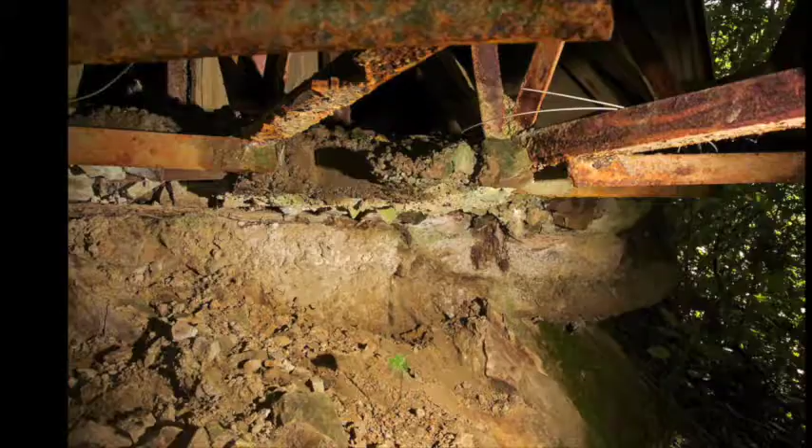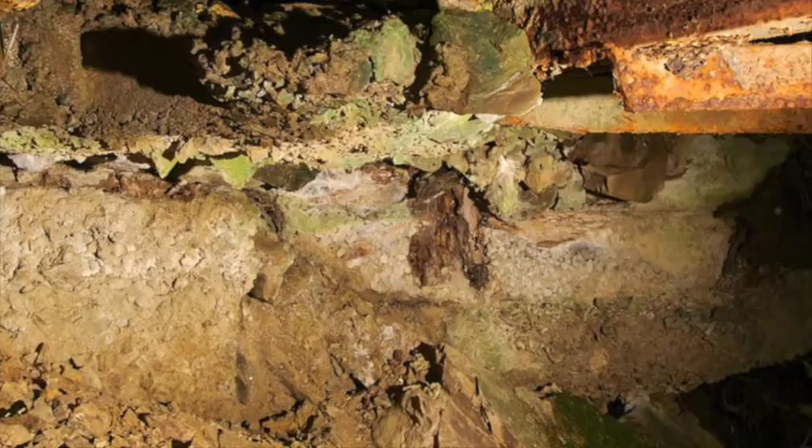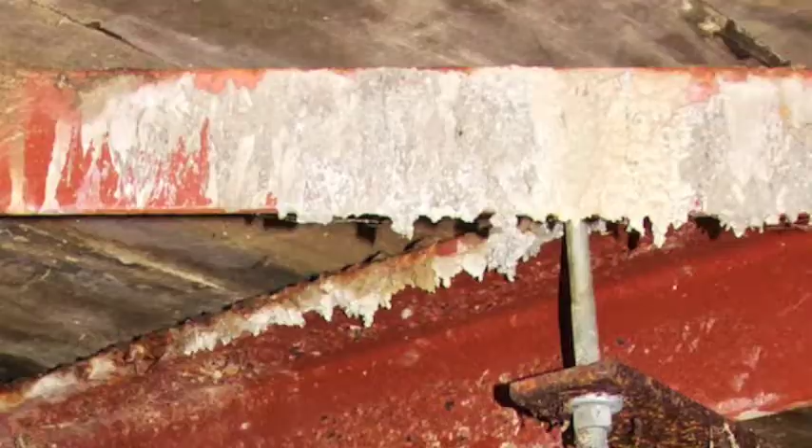An integral part of the foundations and the abutments of the bridge is the concrete used to essentially hold it all in place. We're at the abutment end here, and the concrete, this bridge was never ever set on this abutment. Somebody's propped it up on a timber block to get it into its position, and then they have just put some corrugated iron up against the end of it and dumped concrete down over it. And there's concrete all over the metalwork. It's just an absolute mess.

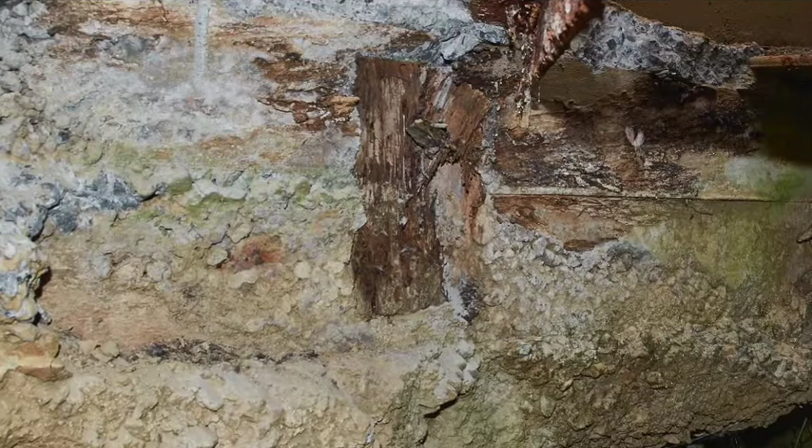So, for example, over here, this is a bit that's intrigued me. There seems to be a beam of wood or something there. That is wood. What they've done is when they've dragged these across here or whatever, they've propped them up and got them to the height they want so they're in alignment with each other, and blocked them up with a block of wood, and then they've just dumped concrete over the top of them. Now, I'm not an engineer by any means, but it strikes me that perhaps you wouldn't want to put wood inside concrete.

No, I mean, the correct way to do this job would be to bore down and put your foundation piles in first. Once you've concreted those up, you may actually box the whole abutment in one thing and put your cages in, tie them into your cage at the top of the abutment work and pour the whole thing at once. Otherwise, you'd pour the piles and then you'd box around those, put all your abutment steel in, position your anchors, box and pour that off, and then you'd crane your bridge in.

Having put the bridge in, you'd normally finish one abutment first, completely head wall and everything, crane the structure in, and then you can put an expansion joint into the back end and pour the last head wall after. Now, correct me if I'm wrong, but judging by the way the steel from the bridge is coming out of the concrete, it's almost as if they placed the bridge down and then almost buried the end in concrete, for want of a better word.

It's very clear that what they've done is placed the bridge to where they want it, blocked it up to suit, and then they've just mixed up concrete and thrown it over the top. And the concrete that they've used, it almost looks like there's several different types, is that right? There are multiple different batches of concrete in this foundation. And is that a standard practice? Absolutely not. I doubt whether some of that would come to 10 MPa, which is what we call site concrete for filling in holes. It is certainly not structural concrete.

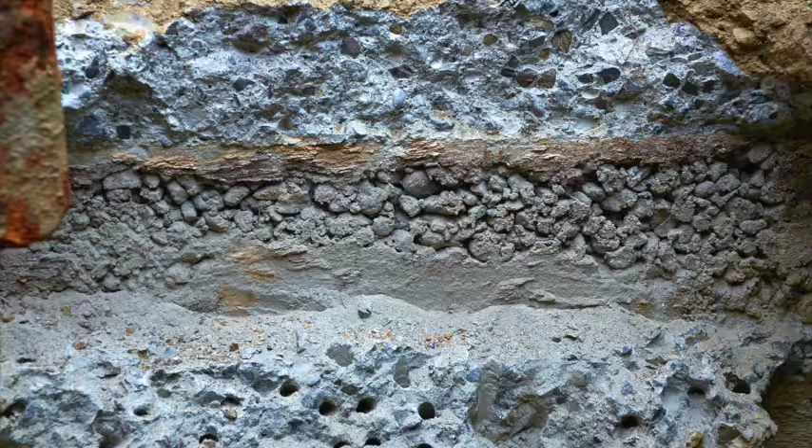So going back to my original question for the steelwork, has at any point in this bridge's life the abutment at the southern end or the abutment at the other end been fit for purpose? No, never. Have they ever been safe? No, they've never been safe. There's been no geotechnical investigation done. Had it been done, they would never have allowed that type of construction. So we're not talking about something that was originally safe and has deteriorated over time. These were never safe. Never, ever safe. So looking at the concrete, and I'm not a bridge builder, is there anything good about it? No.

Now would be a good time to speak with our engineer, John, to try and understand what is going on. Okay, looking at the abutments of the bridge, one thing I noticed when I photographed this bridge is that there are definitely several different types of concrete in the abutment. Is that normal? Well, no. I think on that bridge it's an L-shaped abutment. Yes, it is. You would normally then expect two concrete pours. One would be for the slabs that the bridge sits on, and the other for the wing wall, which goes vertically, keeps the soil back and supports the road as you drive onto the bridge.

Given the size of it, one would expect each abutment to be in two pours, and you would probably pour both of the flat sections at the same time on opposite sides, and then the two walls. But with proper formwork and compaction, one would normally expect it to look fairly monolithic.

So as a layman, I wouldn't be able to go there and then say, oh, there are 3 different types of concrete. No, you shouldn't. And if it's properly compacted and so on, it'll probably have a bit of a rough finish being the sort of structure it is, but it should look fairly monolithic. So you wouldn't expect to see large, like 3/4-inch pebbles in there? Well, if you can see individual stones, it indicates that the concrete has not been properly compacted. Yeah, you can definitely see individual stones.

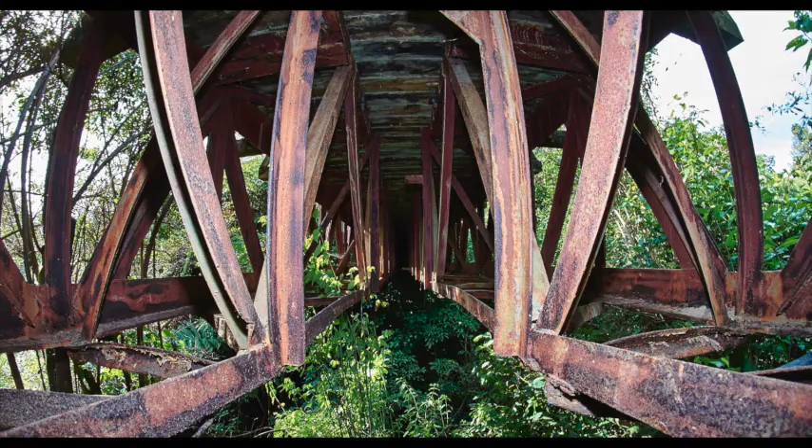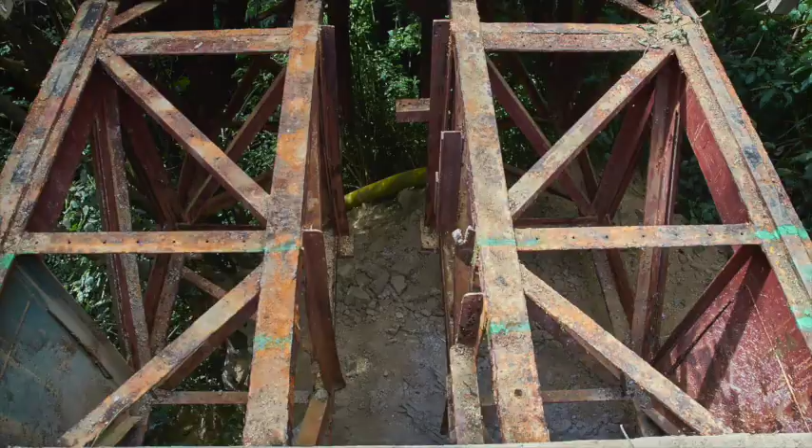The next part Stuart and I looked at was the steelwork which makes up the main trusses and structure of the bridge. I see a couple of latticework truss frames that were, in a previous life, some form of overhead gantry. That's a crane, or what is that? That's a mobile structure used for lifting articles in a yard or a building. So it's like a big gantry crane. Yep, that's exactly what it was.

Yes, you heard correctly. The Bad Bridge is made up of 2 gantry crane trusses that originally resided in a concrete yard in Otaki. Now, you know why we had to use new steel for our good bridge in Part 1.

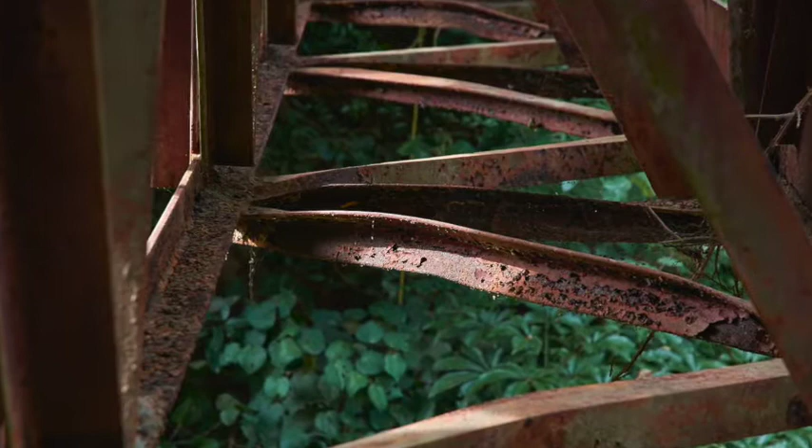The state of the members in it, being the bottom chords, the diagonal braces, the transoms, the bents, they have such severe corrosion on them to the point where, in some cases, they're not even there. They're completely rotted away. Okay, so now let's look at the members themselves. Now, this is a truss crane, so it's basically a box, and I'm looking at the beams underneath, and a lot of them are bent.

Now, if I'm correct, there are 2 ways that they could become bent. One would be through stress in the actual lifetime of the bridge, and the second way would be for them to have been damaged before the bridge was actually erected. So, from what you can see now, which of those 2 do you think it is? From the bends that we have in these members, it is clear to me that these bends have occurred dragging these trusses over the ground.

How you identify that is the south end that we're sitting at has significant damage to multiple members, all in the same direction. If you go to the north end, there's next to no damage there, because that's the end that was picked up and dragged. So essentially this end that we're sitting in was in contact with the ground for a greater period of time. Scuffing down the road.

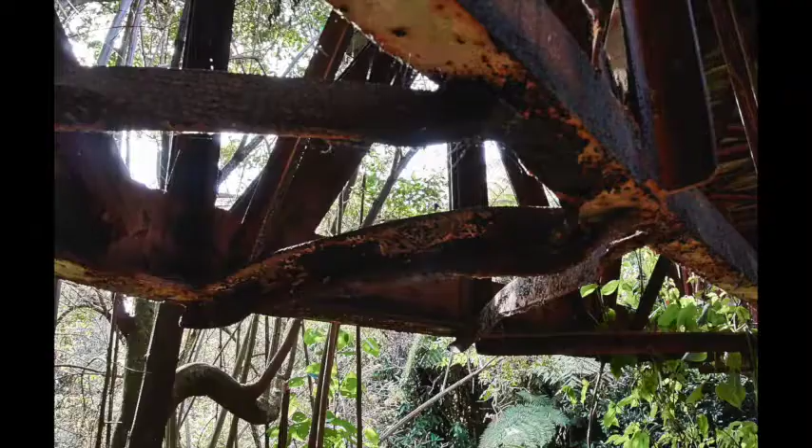And needless to say, one would have thought that Mr. Bolton, being the PS1 engineer for the bridge, and having seen the bridge in its installed position, would have at least noticed the damage and certainly should have ensured that the contractor repaired the damage. Sadly, none of these things happened, and what is more, the council inspector also didn't notice the damage.

John Scurry. Now, I'm assuming that as the PS1 engineer, and for that matter probably the council inspector, first of all, it would be reasonable to expect that you would pick up that kind of damage to a corrosion prevention coating. Would that be correct? Yes. If you are the design engineer, you should keep in mind essentially how something is going to be handled and built. One of the things that is... Just talking about buildings for a moment.

Yeah. One of the things that has annoyed me enormously in New Zealand is often the paint systems you specify on exposed steelwork, say some columns in a foyer or whatever, they can be extremely expensive three-coat systems, and yet that steel will be painted with this pristine finish, and it will be thrown on the back of a truck and other bits of steel thrown on top of it, and lifted with chains and the paint system damaged.

And I insist on, I put in my specifications, if a proper paint system like that is applied in the shop, I say that the paint must be allowed to harden. Yeah. You must lift it with soft straps. You must have timber dunnage and soft packing in between. So it sounds to me, as the PS1 engineer, you're actually responsible for, first of all, specifying the kind of corrosion protection coating that needs to be applied.

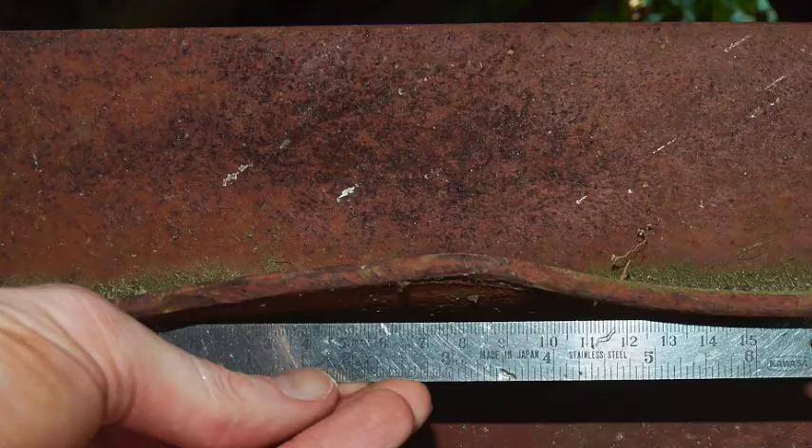Yes, and particularly if the member is in compression. If you've bashed a member so that it's got a big bow in it, then its strength in compression will be far less than if it didn't have that big bow in it. And if it's in tension and it's got a big bow in it, well, it would make it far more flexible.

Basically, they're supposed to be straight members, and the contractor is supposed to handle it in a way that it goes up and it's straight. So far, we have looked at the mechanical problems with the metalwork. Well, I'm afraid, as the old TV saying goes... but wait, there's more. What else is there about the steel?

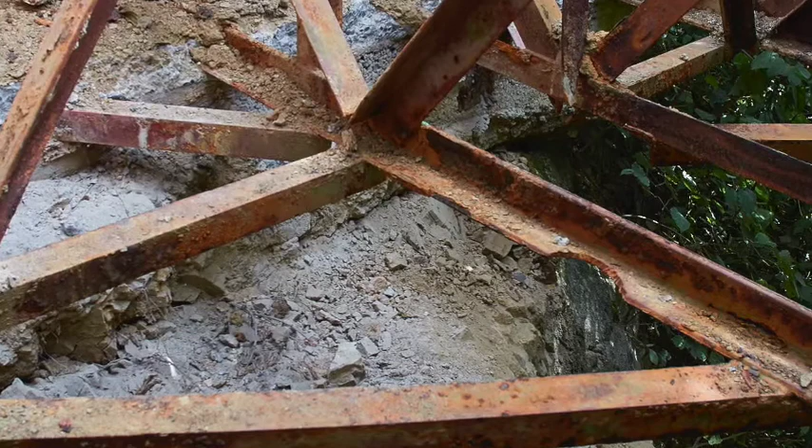So, for example, I'm looking down here and it's almost as if someone has actually bitten a chunk out of this. It's basically an L section, so it's like a corner, and it's as if someone has bitten a chunk out of it. Now, tell me about that, because when we were talking before, you were telling me that if there was a washer missing or a nut missing, the engineer had to do, or would be at the very least expected to do, a defect report. And we're looking at a beam that has a whole chunk missing.

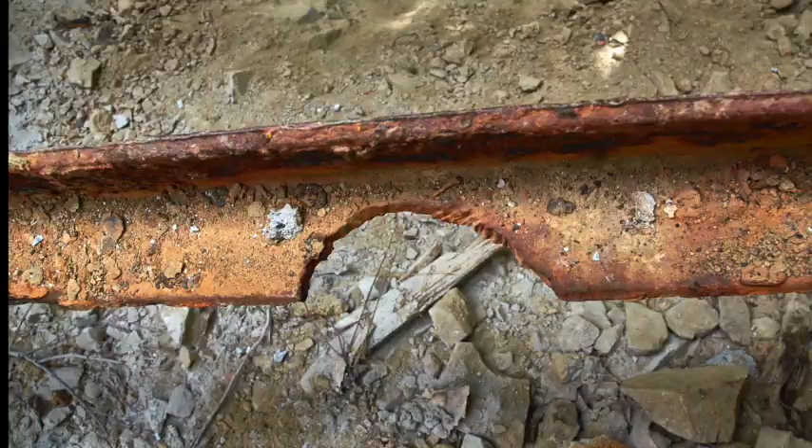Yes, and I think you'll find if you check Peter Bolton's original design, he makes mention of pieces that have had gas cut. That's had a piece gas cut out of it. Something was possibly welded to it in its former life as a gantry, and it was cut off, and they obviously weren't considering reusing it. Whoever bought these to use them as the bridge, the consultant has said these need to be rectified. They have to be cut out and repaired and then blasted and painted, and the work has clearly never ever been done.

So if you as a bridge builder, if somebody did that to you, or you found that in one of your bridges, presumably you would be beside yourself. Just this little chunk, never mind all of the bent beams, the rust, the fact that the things probably should have been condemned before it was even built. That is a bottom chord, and that is a tension member, and you've just removed 40% of it. So that's really bad. That's really bad.

So to put that in perspective, that's like having a person hang from a cord, and the person weighs 100 kilos and the cord can carry 100 kilos and there's a big chasm underneath them, and you just take 40 kilos of strength away from the cord and hope it will hold. That's correct. So looking at the condition of this metalwork as it is now in March of 2015, and assuming that no preventative rust treatment or no intermediate rust treatment has been done, is it possible that when the bridge was constructed there was no visible corrosion on it, no rust?

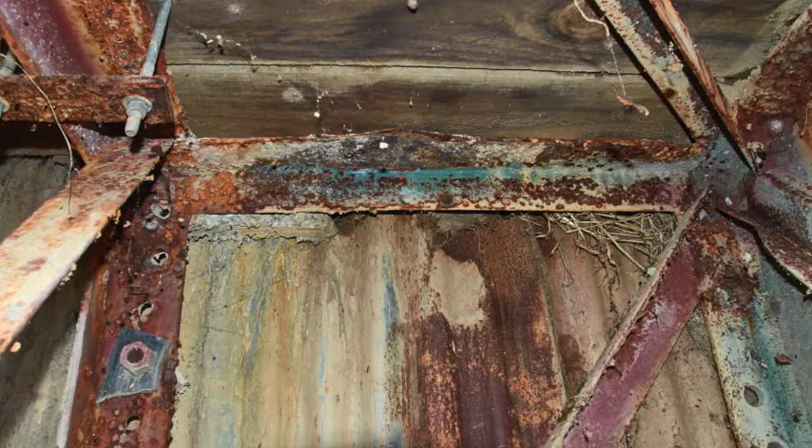Absolutely not. This corrosion's been here for 20 years or more. It is not possible to overstate the terrible condition that the steelwork of this bridge is in. And even as a layman, I have very little trouble believing that on the day the bridge was installed, there must have been some rust visible. But I am not a corrosion expert. Luckily for us, Mick Morris is, and he has seen the pictures of the bridge.

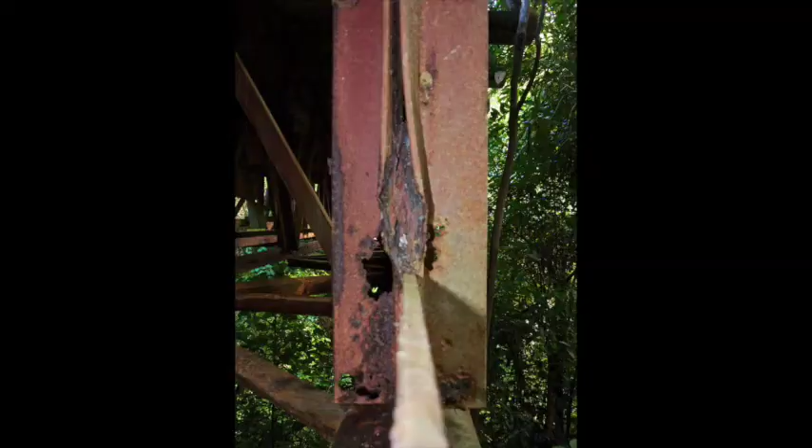This is an example of debris being stuck in a crevice, isn't it? Yeah, and then back-to-back members, angle iron. And take me through what's happened to that section, because it looks like someone put a little balloon in between the two members and just pumped it up and pushed them apart. Yeah, it's significant crevice corrosion. And unfortunately, that's a design flaw as much as anything. And does this go back to when I was asking you before, if I was designing a bridge in an area where I knew there was going to be debris, you probably wouldn't want to create crevices like this where stuff could accumulate? Exactly.

Looking at this picture, and again, this is DSC 1342, the damage where the steel is actually missing, from a coating standpoint, let alone from a plain looking at steel standpoint, would there have been any signs of damage there when the bridge was installed 17 years ago? Almost certainly, assuming the bridge is in the environment that you're describing. Yeah. Because the deterioration of the member that's in the photograph we're looking at, DSC 1342, is such that it's physically impossible otherwise in the absence of any other intrusive elements.

And the intrusive elements would be something like salt, air. Ordinarily, yes. Sometimes though, stray current and those sorts of things are relevant, but from what you tell me, this is in the bush with nothing around it. And there are no electrical cables going through it or over it anywhere near. Stray current's almost, it's highly unlikely.

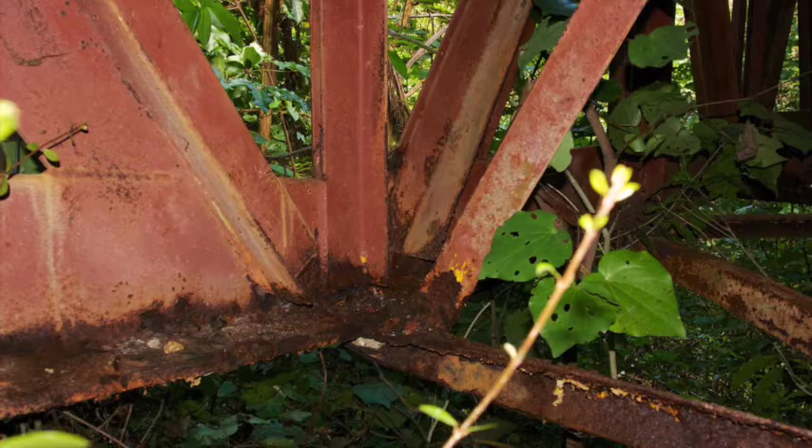Exactly, because quite simply, you're looking at a coating that I've got to guess at, but a coating that probably wasn't meant to do anything other than be under a top coat, protecting steel for 17 years in this particular environment with reasonable success. Those portions of those members have done well. They look quite okay. However, there's significant rust directly below it, and that's where stuff's been accumulating. So logically speaking, it couldn't have been in particularly good condition in terms of its protection from corrosion at the time that the bridge was actually put into place.

And the other thing I suppose to note is that if there was more than one coating of protective material applied to the bridge when it was made, in the natural course of the protection degrading over time, presumably you would start to see different colours as the different layers became visible. Ordinarily, yes. Earlier in the conversation we talked about the nature of a high-build system, the fact that we have a zinc primer, which is grey because zinc's grey, on the surface that we're going to protect initially. So this has probably not had zinc applied to it, do you think?

I think that what we're looking at there is a primer. And a primer is just paint. It's not a zinc treatment. It could be anything, and without testing again. Yes, of course. Exactly, but it might be a red lead primer. I'm not sure. But whatever it is, it appears to me to be a primer, and it hasn't had any build coats put over it. Except a thick layer of debris.

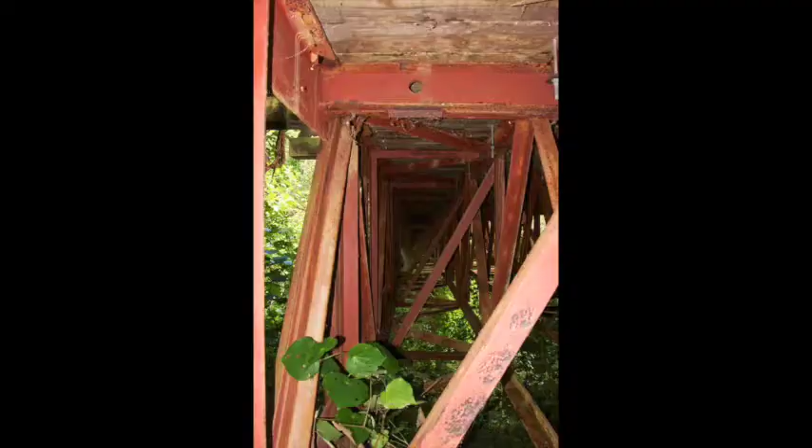See, again, we're looking in this picture underneath the decking surface on DSC 1353, and to me as a layman, I can see red paint. Now, the impression that I'm getting from you is that this poor layer of primer that was applied perhaps when the bridge was new has pretty much been just left to fight the battle all by itself. It looks to me to have done a fairly good job in most cases, which is why I suspect it may contain lead.

So again, we're looking at DSC 1355, and you can see here we've got what seems to be intact red paint or primer with perhaps a splash of yellow. Yeah, I don't know what happened there. But if you think of it, these surfaces are allowed to drain. Yes, and so the paint's reasonably intact. Exactly, which in turn means that there's very little debris collects on them. Whatever rain and things gets under there washes them off.

However, when you get down to these crevices and areas where debris collects, there's something there to hold the moisture. The moisture contains the oxygen, the steel contains the iron, oxides, rust. Look at it. And we can actually see some leaves poking into the right-hand side of the picture. Just add a bit to it. It's a lovely moist area, I can see that.

Yeah, it's brilliant. So we're looking down, this is Bridge 15th March 2015, frame 6, and we're looking right down the side of the bridge. And again, just as a layperson, it looks to me like there might be some red paint, which again seems quite well protected because it's at the apex of the truss. But as you were saying before, down the bottom, where the debris is collected, you've got corrosion, which is what you'd expect.

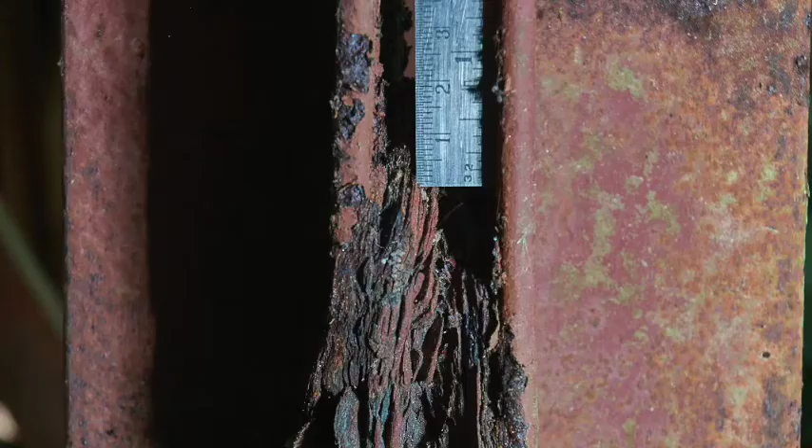Yeah. And in particular, when it's a zinc that's going onto the steel, you want the two elements to be in touch. So you don't want any contaminants to get in between the zinc and the steel. So looking at this particular section in more detail, this is a ruler here, which is about 10 millimeters. So the steel, I've measured it, is 10 millimeters thick. And we're looking at frame 15 March 28.

Now this, to me, looks like papier-mâché. Or, no, it actually looks like puff pastry because you've got so many different layers. So what's happening in there? Why is that steel suddenly... Crevice corrosion, and it's occurring for the reasons that we've discussed. And how does that actually physically work, though? So something gets stuck in there and a little bit of corrosion starts. But this looks like there are almost a dozen different individual layers. It's just crevice corrosion manifesting. Yeah. That's how it'll always appear.

Okay. It's a very powerful process too, Jack. The corrosion won't stop occurring, so the expansion won't stop either. So not only are you losing steel and therefore structural integrity, the expansion which is being brought about by the corrosion occurring is damaging the structure. It can, for instance, break fasteners and things. If the expansion goes too far, they stretch too far and break.

Right. So basically in this situation whereby you've essentially got two vertical pieces of steel that are about 15 or 20 millimeters apart from each other, not only do you have the corrosion weakening the inside, but the steel that's still intact on the outside is actually being pushed outwards by the corrosion. So it's almost as if you've got a car jack between these two members and started jacking them apart. That's what's happening. On top of the corrosion.

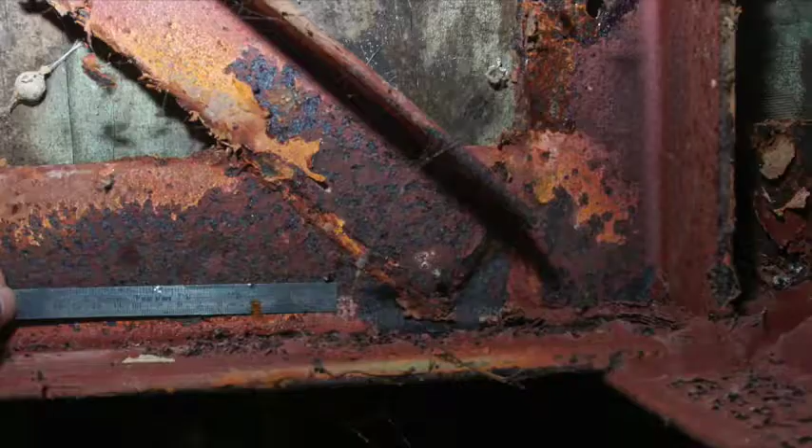The member, yeah. Now, it's interesting you should say pitting because this is on the underside of the bridge, under the deck, and this appears to be maybe a yellowish... It almost looks like someone put orange spray paint on top of the red. My guess is that it's the deterioration of the paint that was there. I was going to say primer. I don't know that it's a primer. Yeah. But there seems to be only one layer of whatever it is. There does seem to be.

I mean, the fact that the main coating there is red and what we're looking at's yellow suggests that at some point it had a yellow coat over it, but the lack of evidence of it across what I've seen of the whole structure so far says to me that this is possibly something that's isolated, and it might even be to do with the deterioration of the coating and staining from the rust or similar. And that's frame 33 on the 15th.

And then another one is this section here. So this is essentially... What section, Jack? There's nothing left here. Yeah. And this struck me as quite extraordinary as well because I'm fairly certain that the original thickness of that steel was about 10 millimetres.

And this is, if you imagine an I-beam, so the letter I, we're essentially looking at the left top edge of the I. And it's, again, like pastry. But it's not sandwiched. So how does that effect happen? I think I have a better photograph of it. It's just corrosion taking its course. We'll talk about these later on. Look at the pitting. That's quite extraordinary.

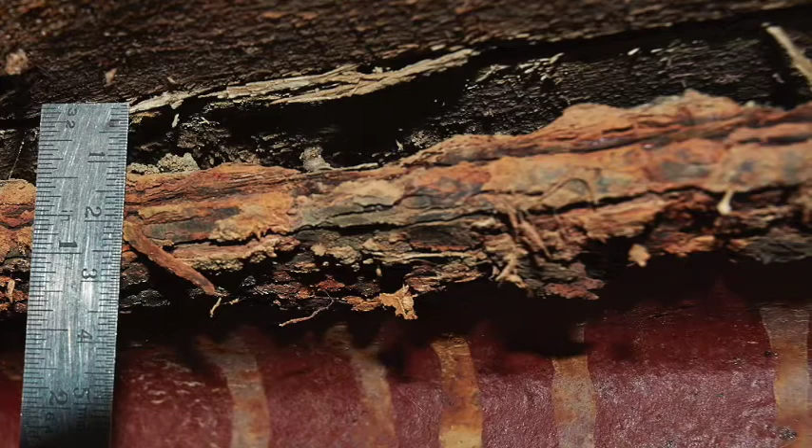I mean, is it necessarily appropriate to use a crane, something that was put together and intended to be used as a crane, as a bridge? Not this one, anyway. Exactly. I don't know. Perhaps it is. Perhaps they're excellent. See, there's a measurement. That's 10 millimetre thick. That's a close-up of a section. And again, this that we're looking at here is frame 48.

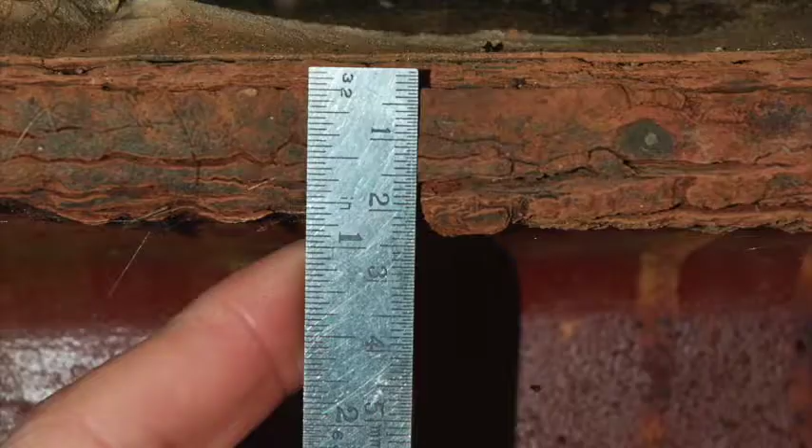Let's say that it was used... Okay, let's do it this way. If this was a different steel, say a steel for a crane, presumably there wouldn't be that huge a difference from the standpoint of the corrosion. And if anything, I should have thought that if it was a higher quality steel, it might be less susceptible to corrosion, or is that wrong? The amount of carbon in the steel is relevant, but there's no one-size-fits-all answer to that question. The different steels will perform differently. Remember at the start of the conversation we talked about Corten steel?

Yeah, we did. And so from a coatings perspective, is it fair to say complete disaster? Absolutely. Although I don't think we should hold coatings in too poor a regard because it seems to me there was very little coating on it when it went in there. Just as a layman, as I said earlier on, when I looked at the bridge from the surface, I thought it was all right, but as soon as you get underneath... Yep. With council and government bridges, there's a regular inspection regime. With a privately owned bridge, people don't get under there.

Now we're looking at this. Remember, we had the vertical section, and there was the pitting at the bottom. It was split apart, and there was a hole in it. Now this is frame number 53, and the thickness of that original steel was about 5 millimeters, because I've got a ruler here, and the gap was slightly less than 15 millimeters. So it was about 5 millimeter steel. And again, this is frame 54. What does that do to your heart?

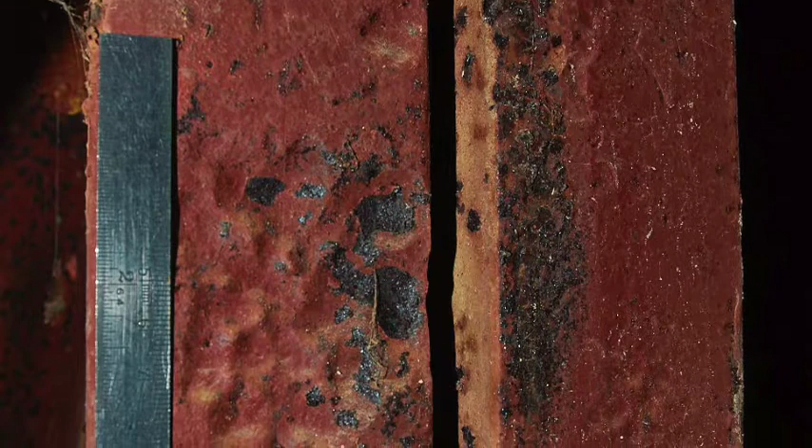I'd be astounded, in fact, if it's been painted since it's been in there. Yeah, so it's safe to say in terms of this frame 40 on March the 15th that the paint that we're looking at is actually the original base coat or whatever it was that was applied. I'd be confident that that was there in 1998. Along with the holes. Along with the holes. They didn't appear since because the coating's intact. Yeah, and again, this section here, you can see the coating's intact on 43.

So to summarise, having seen the pictures that I've given to you and your experiences since 1995 with numerous bridges, how does this bridge make you feel? It's extraordinary. It's quite negatively stimulating. I hate to see it, frankly, but it's an example of the sorts of things that are out there. And this is what happens if you don't get the coating system right in the first place. Specify the right system, prepare the surface properly, put the coating on correctly, and make sure that that's how it is when the structure's left.

And you, as a coating professional, what would your comment be on the performance of the people that applied the coatings to this bridge? Well, they probably did it quite well, because I think when that was done, it wasn't a bridge. From everything you've shown me, I can't say to you, Jack, that there's been any painting done to this structure since it's been a bridge, or even probably prior to that. It seems to me that it's probably a crane that's been taken out of service and just put in to be used as a bridge. I don't think it's had any attention at all.

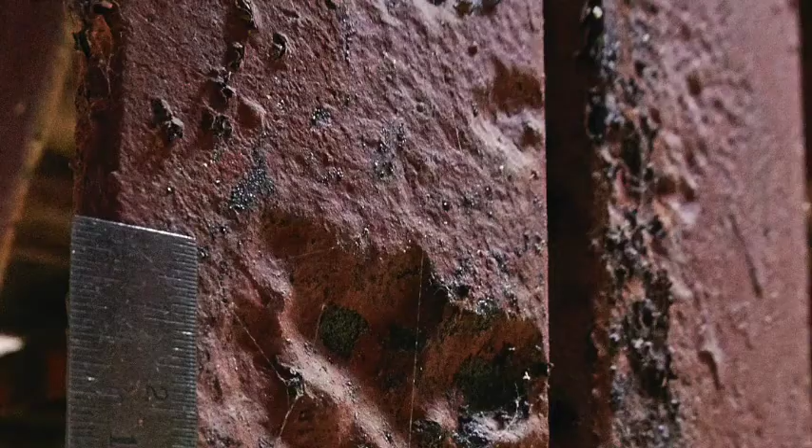So basically, there's a possibility. I mean, we can't confirm it, but now that I think about it, I think you're probably right, that this was originally installed as a derrick crane at a concrete yard some years before it became a bridge, and essentially it went straight from there to being a bridge, and there was no paint or corrosion protection done from then to now. That's how it seems to me. You've shown me nothing that tells me that it's had any attention at all.

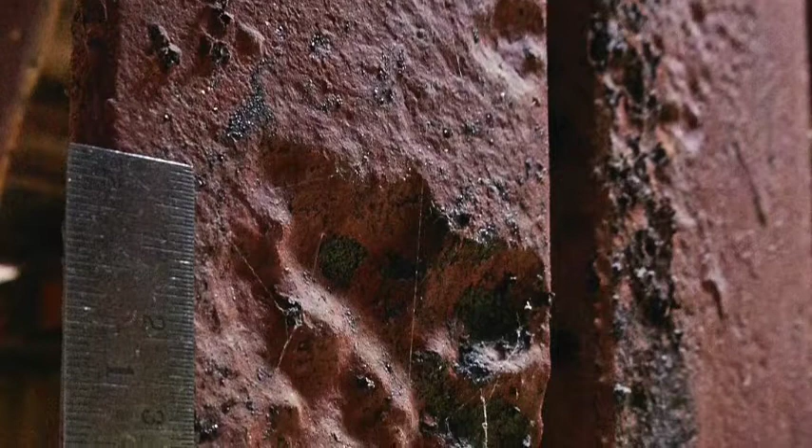So again, if you were someone working on a project like that, you would pick that up, wouldn't you? You would notice that. To me, and I repeat, I'm not an engineer, but just as a coating specialist. Well, it has too much pitting to have gone into service. Yeah. You need to ask an engineer, but I think that some of those pitted members would have needed to have been replaced, and this is prior to any consideration of coating the structure so that it won't corrode.

You've got members in there now. You showed me one with severe pitting. Pitting in the steel, and the coating's still intact, which means that unless it's been painted since the structure went into place, that pitting was there when it went into place. When it was a crane. Which in turn means that, if I'm correct in my guess, and I stress it's a guess, this is a job for someone with different qualifications to me, it was too pitted to have gone into service in the first place. This appears to me to have had no coatings attention at all.

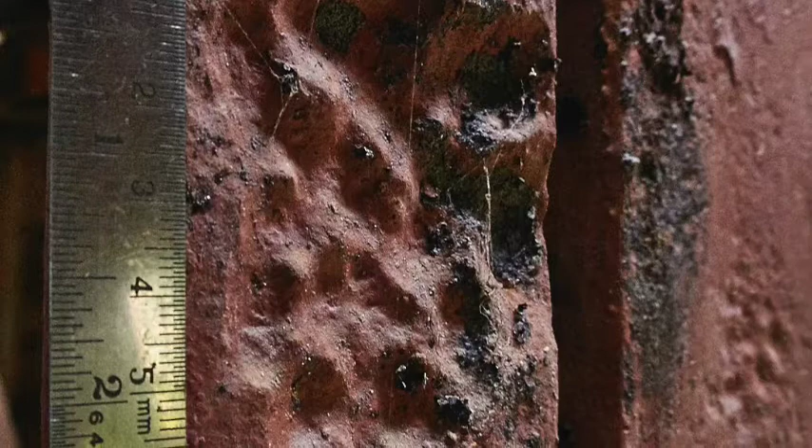And as it happens, you're able to show me a frame there that shows significant crevice corrosion, but with paint over it. And so if it hasn't been put there since the structure went into place, obviously it was always there. Okay, now let's explore that point you've just made. First of all, what is pitting? Not crevice. This one here, what we're looking at now. That's pitting. Yeah. What's pitting? How does that work?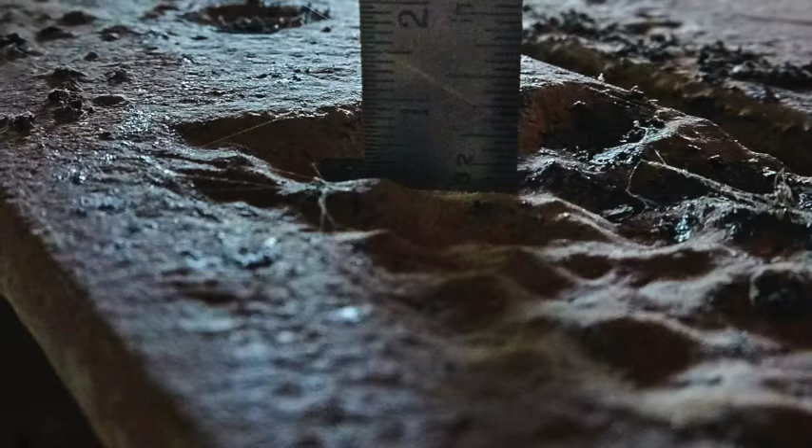Well, we've looked at rust in various circumstances. Because this is a vertical member. That's correct. We've looked quite a lot at crevice corrosion, which is rust in a crevice. Pitting, for the sake of this discussion, is rust in a hole. That's all it is. It's no different. And it almost burrows in. Yeah, for the sake of this discussion, it's rust in a hole. There's more to each of those forms of rust than meets the eye. Normal patches of rust are to some extent compounded by the remaining coating because they're exposed and the rest of the surface is not. Pitting and crevice corrosion vary with the size of the crevice.

I said to you that in some cases they're mating pieces. There was intended to be no gap between them, and the ones you've been showing me have a significant gap. There are other things that affect crevice corrosion, but for the purposes of this discussion, they're not that relevant.

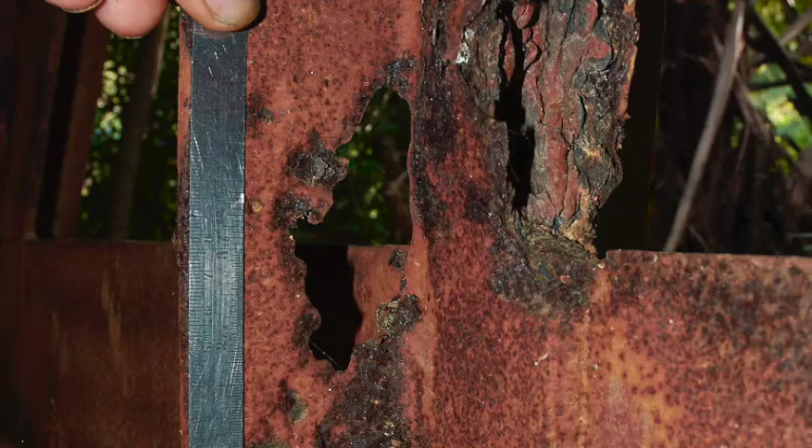The pitting. The pitting that you're showing me is significant, and it means that the steel that used to be there isn't anymore. And in the case of the frame that you're just bringing up, this is frame number 40 on the 15th of March 2015. There's significant pitting with intact coating inside the pit. So the pit, basically this severely damaged steel was coated with a protective layer.

Exactly, and I mean, heaven knows when, but given what I've seen of the rest of the structure, it wasn't since it went there. I've no way of knowing that. Perhaps someone went in there and coated the pits. Fairly unlikely, but it could have happened. As a layman, it's almost like you've just smashed up your car, and the way you're going to fix it is by painting it.

Wow, because to me, that steel looks pretty bad. The bog has fallen out. Yeah, right. Exactly. The bloke before you told you it'd been driven by a little old lady and never had an accident. And in fact, you've run into something and you've found all the filler has just fallen out onto the ground. It had an accident. It had been repaired. In the case of this, though, it's exactly that. The pitting's quite obvious. The difference between the bridge and the hypothetical car is that they didn't put any bog in there.

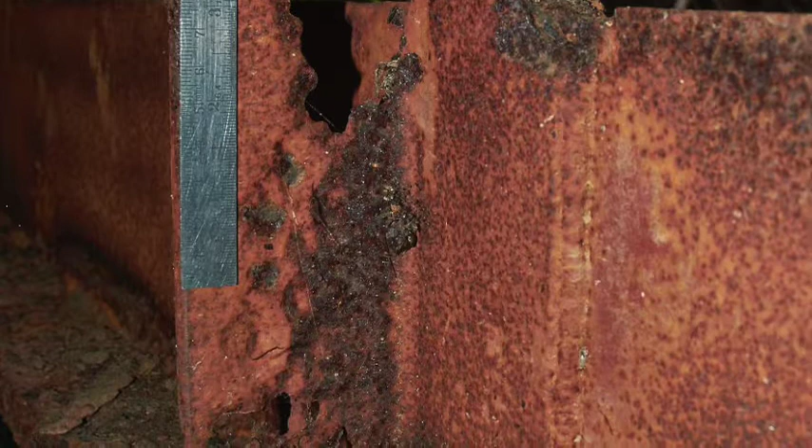I realise that some of you may think we have spent an inordinate amount of time looking at the steelwork and its corrosion. There is a good reason for this. It is very difficult to understand how it could have been possible for the steel on the bridge to be in brand new, fully and properly rust-free and corrosion-protected condition on the 10th of February 1998, the day the second site inspection was completed by Mr. Bolton. It was on this day that Mr. Bolton wrote on the top of his site report/instruction form, and I quote, "Bridge construction complete." None of the major problems we have not only heard about, but actually seen are mentioned on the site report.

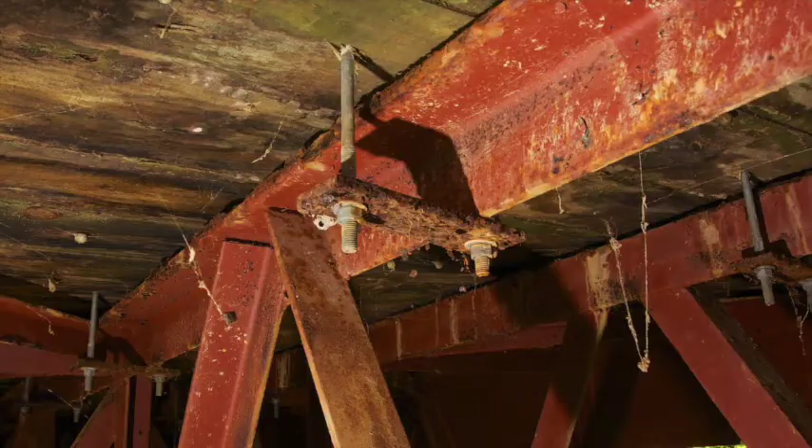Next, Stuart and I looked at the underside of the road surface. Okay, so now the next bit of the bridge. The first part of the bridge is the abutment, the second part is the steel structure. Now we're looking at the road surface from underneath, because I suspect you're going to have a fair bit to say about that. How important is the road surface? This is the surface that the trucks and the cars go along. The road surface is critical to the vehicles on top, and if it's installed correctly, does play an integral part in the bridge.

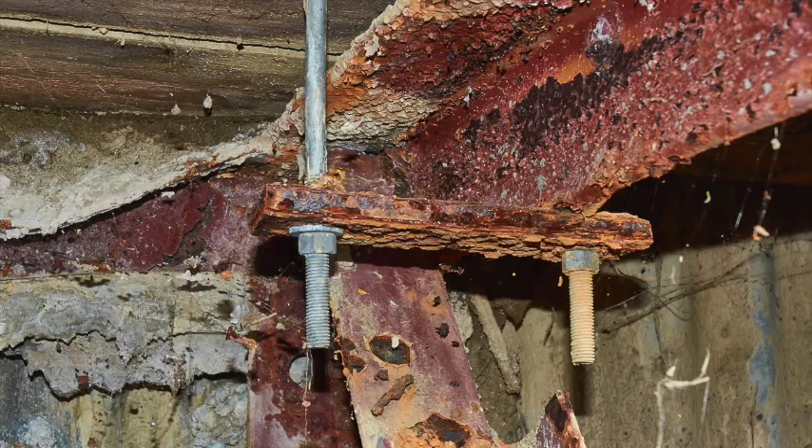You can increase the depth of the chords by putting sufficient anchorage in there and gaining further compressional depth out of it. You won't get anything out of this thing. It's not tied down properly. It's got 2 bolts every metre. The rest of the boards are just floating there. So basically what we're looking at are, if I'm not mistaken, like railway sleepers, almost that kind of size. Yeah, they're Pinus radiata. It's low-grade timber. They're 140 millimetres by 200 millimetres, and they do not meet code.

And so most of them are lying on the surface, and then every once in a while there's one that's actually bolted down. That's right. Every 5th or 6th board is bolted down, and it is bolted down with a couple of 12mm bolts. And one thing I'm looking at: there are the 2 main structural lines going out on the left and right outer edges, and then there are 2 other ones on the inside. So it's almost like there are 2 box sections going down.

And it seems to me that neither of the sections in the middle are actually in contact with any of the boards. That's right. What they've done is they've just thrown the boards on top of the gantry rails. So these are the rails on either side, on the outside? They are the rails that your little bogie runs along to carry your crane assembly. And the timber is only bearing on those points and has got a 45mm gap between that and the inner truss face.

So should they be supported in the middle? I mean, it should have been supported there, and that would have made the deck capable of withstanding the wheel loads that it has to. So am I correct in saying that basically all of the load that is transmitted from the deck onto this bridge is actually only being transferred to the 2 outer edges?

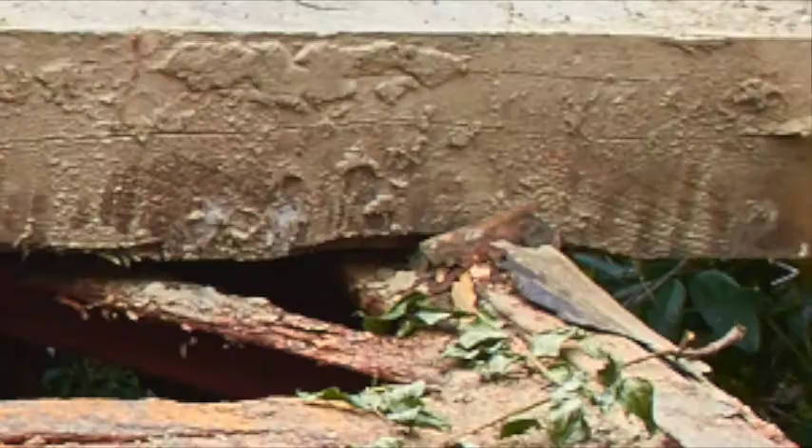That is correct. The 2 mid edges are basically doing nothing. That's correct. And that's not a good idea? No, I mean, the truss, that's the whole thing. The way this truss was designed, it was designed to put the load into that, but as a bridge, the inner faces should have been beefed up, and then it should have been packed to the deck, and then you could have transferred all that extra load down into that other truss member.

And the other thing is that the left one seems to be about twice the separation from the surface as the right-hand one. Yeah, well, that's what happens when you start blocking things up with blocks of wood and you don't quite get them right and you're not worried.

This raises another issue with the bad bridge. The span of the bridge in reality is about 21.5 metres, but on the original specification and in the PS1 calculations, it was stated as being 16.5 metres. Thus, the calculations used in the initial design were actually wrong. The span the consultant has used, given to him by the developer, was 16.5 metres. These trusses are 21.5 metres. That's 5 metres shorter. The span is 5 metres shorter than the overall truss length.

When you take a structure and you double its length, the structure needs to be 4 times stronger to carry the same load. And this is not the only problem with the design calculations done for the bridge. John Scarry: I was made aware of problems in defining what the actual truck loading to be used was. Yeah. There wasn't a clear statement as to what vehicle the bridge was to be designed for.

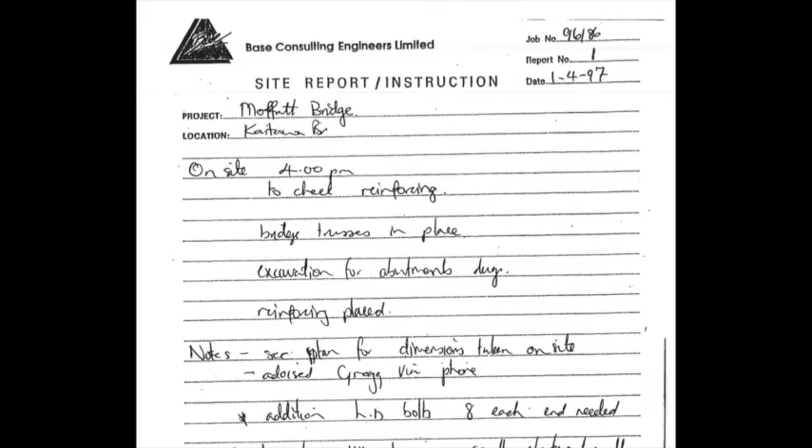John Scary, if I'm not mistaken, it seems to me that he hasn't had any geotechnical report done at all, and he's visited the site and basically they've already put the bridge in. For a small bridge, you might say such and such a bearing strength required to be confirmed on site. And obviously you want to be bearing onto soil which is not going to be easily eroded from underneath your abutment. But it's a bit late if the bridge is largely in place to be trying to check your bearing. So as an engineer yourself, I'm assuming that the procedure that Mr. Bolton followed wouldn't be one that you would follow. No, you would normally want to know what you were building it onto.

So tell me, what is holding this bridge up? What is actually holding us up? The grace of God at the moment, because there's nothing much under that foundation there. The bank has crumbled, and when you look under there, there is fractured brown rock, which realistically a slight earth tremor could cause a whole lot to go.

Design the bridge. As we learned in Part 1, the New Zealand Bridge Manual is the basis for bridge design in New Zealand, and more importantly, it is the basis for bridge design in the Building Code. Looking at the original design certificate for the bridge, there is a section into which the engineer is to enter the relevant building standards. The New Zealand Bridge Manual does not appear there. John Scary: It's not unreasonable to expect that when the council was presented with a PS1 and they knew that it was for a bridge, they would expect to see under the list of standards the New Zealand Bridge Manual.

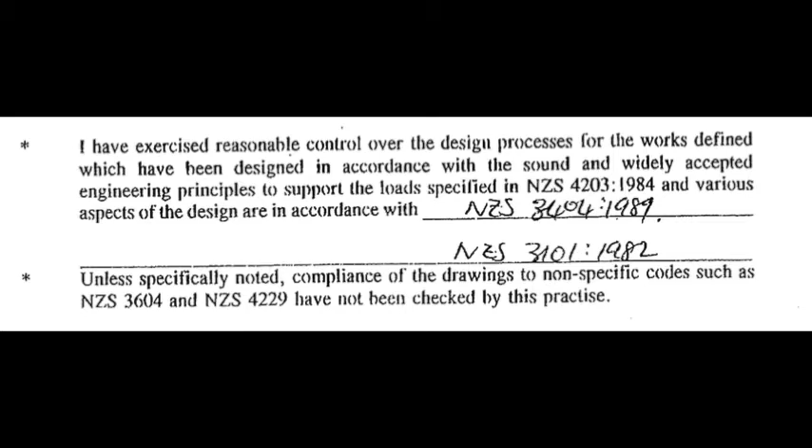Yes, and also, again, for a producer statement for a bridge, one might think they would check to see if the person actually had designed bridges before. It is also at this point that the materials for the bridge were chosen. The customer had presented the design engineer with a former truss crane from a concrete yard and asked him to use it as the structure for the new bridge. We are already familiar with the various defects in the steelwork, so we won't repeat them here.

John Scurry. And the Moffatt bridge has 4 trusses, doesn't it? Yes, they were apparently reused off a crane out of a precast factory or something like that. Now, if you were the PS1 engineer, and again, this is a common sense kind of question, but if I came to you and you were my PS1 engineer and I said that I wanted to make a bridge over a 20-metre span and that I wanted to use a second-hand crane from a concrete yard, would you have then felt an obligation to actually go and check the steelwork and have a look at the structure?

Yes, using a truss like that for a bridge is problematic, I think the correct word is, because a truss is really designed to have loads put at the node points where the members meet. That's how it's most efficient. One of the problems with a bridge, if you're not having a purpose-designed truss, is what is the effect of the wheel loads when they're between the main nodes of the truss, because that induces secondary bending moments. Now you can allow for that, but with any sort of reused steelwork, you need to know what condition the steel is in. Is it rusting or whatever?

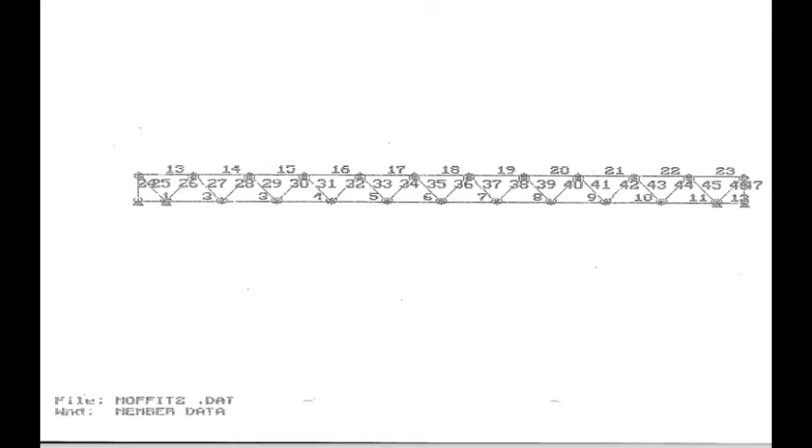But my memory is that some mistake was made in the analysis, and some supports were put into the computer model along the span, which weren't there in reality. So the forces the bridge was designed for did not represent the actual actions one would expect under the stated design loads. And so basically the bridge was at no time ever actually capable of supporting the load that it was in theory designed for? Well, I don't know. The simple fact is that the design didn't match reality. Referring back to the IPENZ report, errors were detected but not removed from the drawings used to build the bridge.

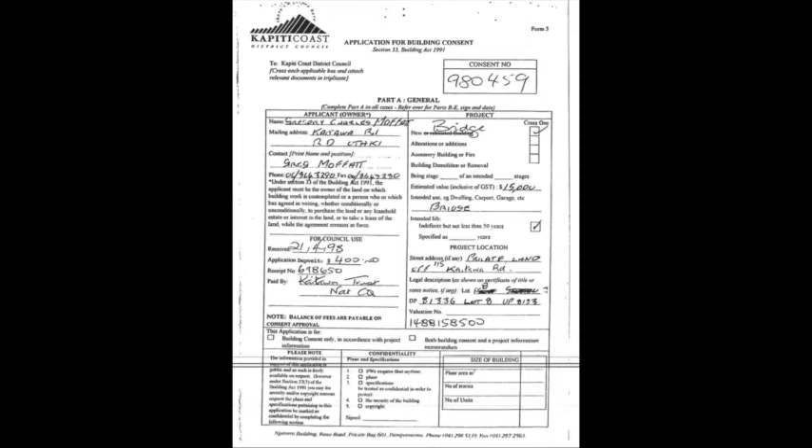8. Obtain a building consent. We have heard previously that a building consent is required before construction is allowed to begin. For the bad bridge, the building consent was issued on the 21st of April 1998, which is fine. The only problem is that according to Mr. Bolton's site report dated the 10th of February 1998, the bridge had already been completed. So now the question becomes, what happens if you do not have a building consent? So what happens if I don't get a building consent and I just go ahead and build it? You would be running an extreme risk.

If the council found out about it, well, irrespective of whether you get a building consent, there is a requirement under the Building Act that all building work, whether it requires a consent or not, must comply with the building code. In other words, it's got to work.

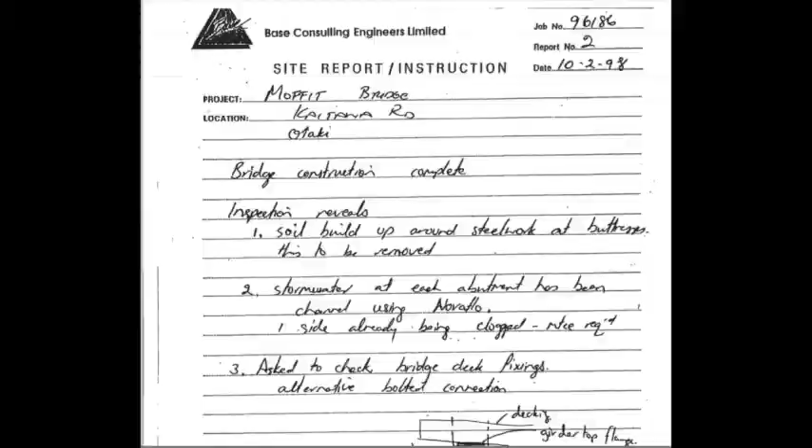If you go ahead and do a design and do some construction without getting a building consent, several things can happen. You run the risk of the structure being ordered to be torn down by the council. You also run the risk of being disciplined for not working in accordance with good professional or trade standards.

And then you also mentioned the fact that in the event that you construct something without a building consent, and if the council was to find out, it's well within their rights to instruct you to have the offending building demolished. Yes. If it was a building and there were no planning issues involved, they may read the Riot Act and then allow the structure to be assessed, but generally they're well within their rights to demand that illegal construction is demolished.

And that's the same for a bridge? Yes, and you also have other practicalities too. If you do an unauthorised extension to your factory and your factory burns down, I would be most surprised if your insurance company didn't say, well, that work was unlawful or contributed to it and we're not paying out.

In the case of the Moffatt Bridge, the original building consent was actually issued after the bridge was finished, and initially the council, it seems, were quite upset. So at that point, presumably it would be reasonable to expect the council to be doubly cautious, having become aware that something such as a bridge, especially with that span, has been built without any kind of building consent. The first alarm bell that should be ringing is if there's no building consent, what is the quality of the work? And the nature of that bridge being some reused trusses, etc.

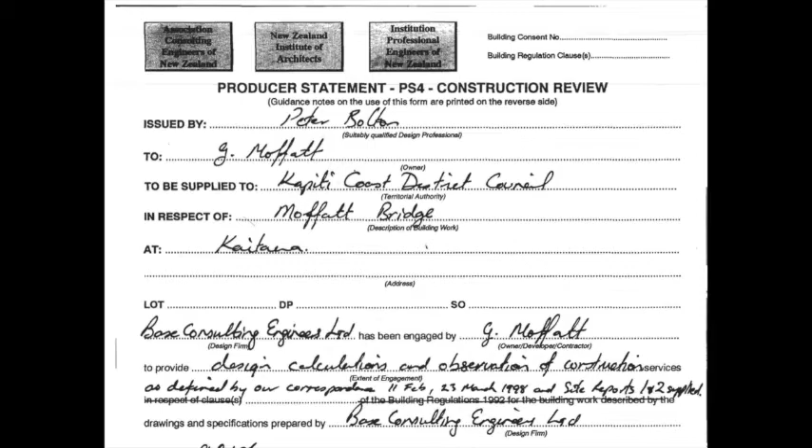12. Council inspection. Despite all that has occurred up to this point, the 17 years of loss, frustration, extreme financial as well as emotional cost that Greg and Lynn have had to pay, and indeed are still paying, could have been avoided had this last step gone properly. But as with so much about the bad bridge, this final opportunity to produce a good bridge was also lost. As far as I am aware, there is no existing copy of the inspection report that was done by the council inspector. In case you were wondering, yes, the bad bridge did get its final code compliance certificate.

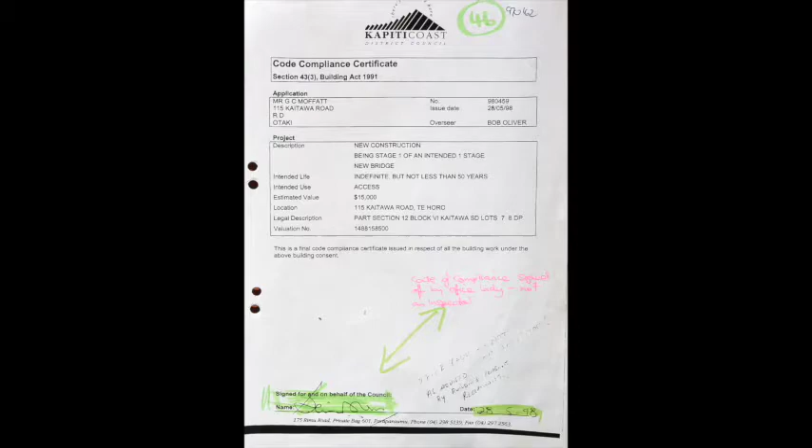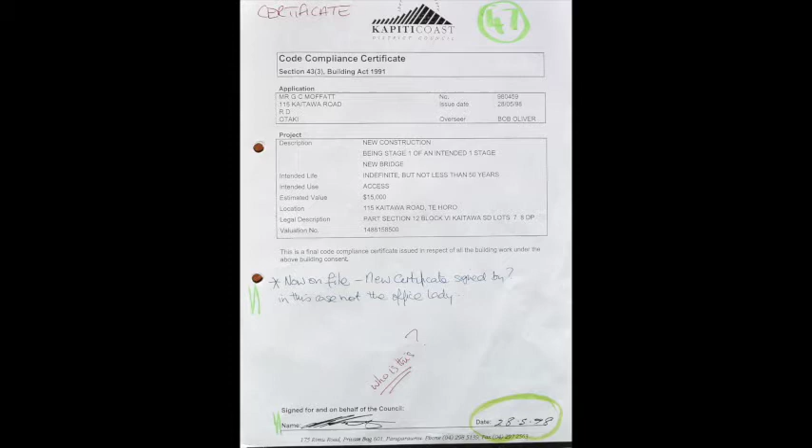In fact, it got two, on the same day, because it is said that the first one was actually signed by the office girl at the council. The second, issued on the same day, is even more intriguing, because according to Greg and Lynn, no one at the council seems to know who signed it. Despite what we have heard, it would be pure speculation to try and say what led the inspector to sign the bridge off as being safe.

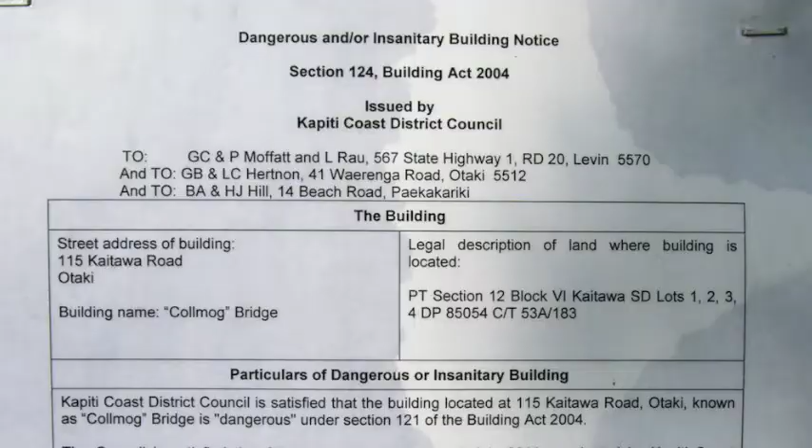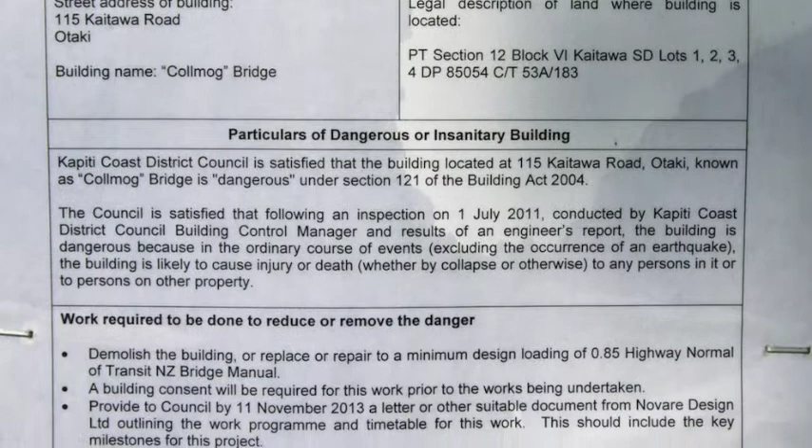And in fact, I am yet to see any document that says who the inspector was and what the results of his inspection were. So the most instructional course of action to take at this juncture is to hear from the experts. So as a rough guess, is it reasonable to say that there were probably at the very least 5 clear instances in which the council could reasonably have been expected to stop or at least make some note as to the things that were wrong with this bridge?

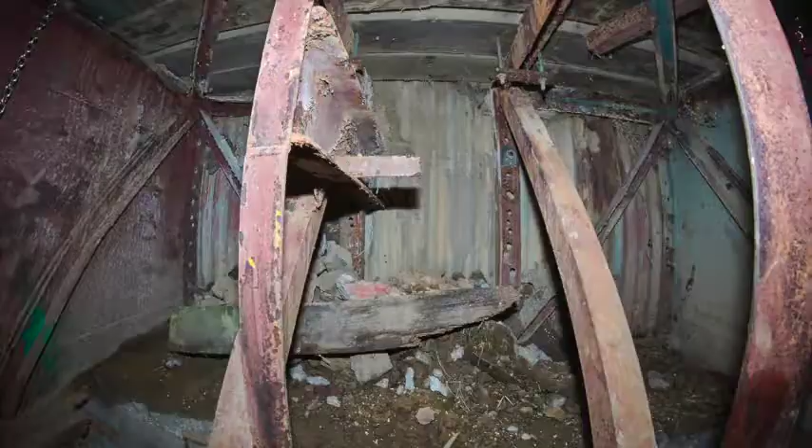Absolutely. The council should have had alarm bells screaming with this bridge. So it's not reasonable to believe them when they say that it's not their responsibility, they didn't know about it. Is there any way in which they couldn't have known about it? It's totally farcical. They took money to inspect the structure. As a regulatory authority, they were required to do due diligence and investigate the design before they issued a building consent.

So I know you weren't here, but this fascinates me. How on earth did this bridge... How did someone not see something was wrong? From the council, the engineer... It's almost as if you had to have a conspiracy because there are so many points at which, as we've just established, a member of the public could have pointed out things that were wrong. There's either been a clear case of neglect where nobody has inspected the structure, or, heaven forbid, somebody has paid someone to turn a blind eye.

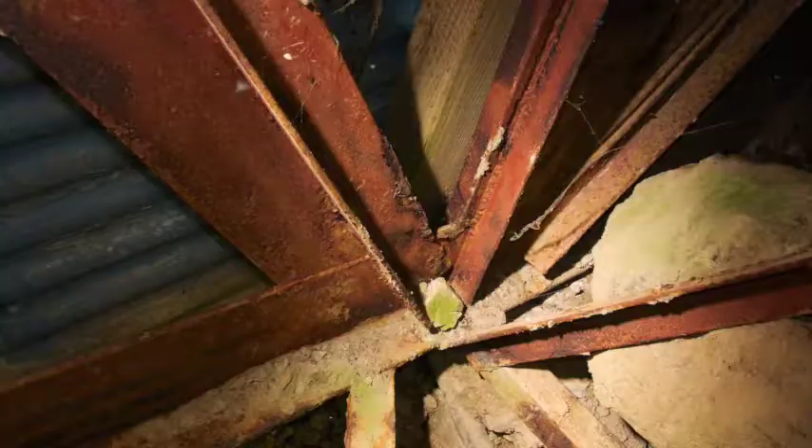And it seems to me the only other possible explanation is that someone who was sent to inspect it just didn't know what they were seeing. No, that couldn't happen. They clearly didn't look. Yeah. So basically, if a housewife could come and see that there was something amiss, then an engineer should... Okay. A building inspector, if he looked at it and couldn't see that, he shouldn't have been in his role.

So here's the thing for me. All of the other things that we've talked about up to now have been engineering things. They've been things like rust, paint, structural stuff. This, on the other hand, is pretty obvious. It's just wrong. So should, at some point, this have stopped the process? If the inspector from the council knew anything about the bridge manual, he would have known, walking up to this bridge, those curbs will never ever meet code, and those rails cannot be used in this situation.

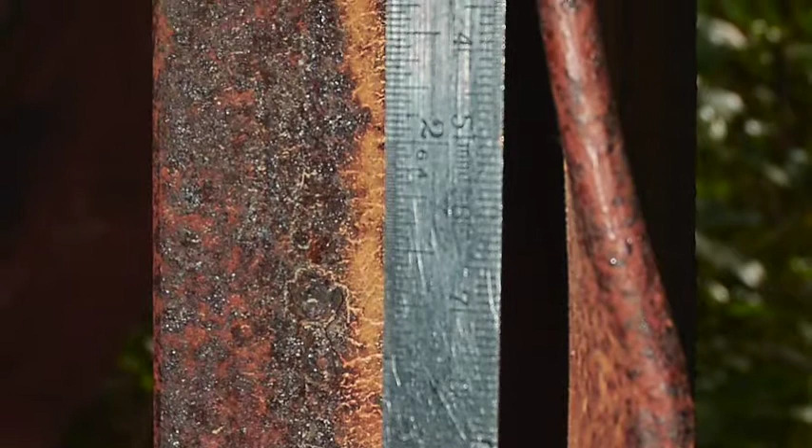So the way I see it, there are 2 possibilities. One is that the rails were never here when the bridge inspector came, because the other scenario is that they are so obvious that I would assume even the most incompetent engineer who even professed to have the minimalist knowledge of bridges... You would have to be blind. Don't dare say that about blind people, all right? If I brought a blind man out here and I'd explained to him the code, he could identify these as non-compliant. Whereas the people that inspected this bridge...

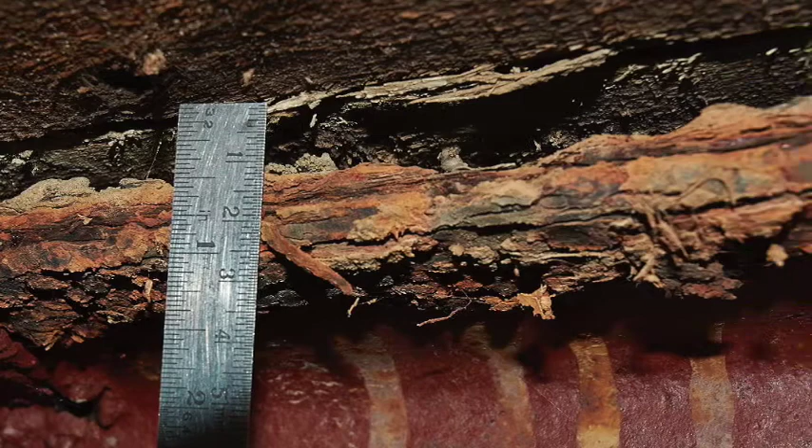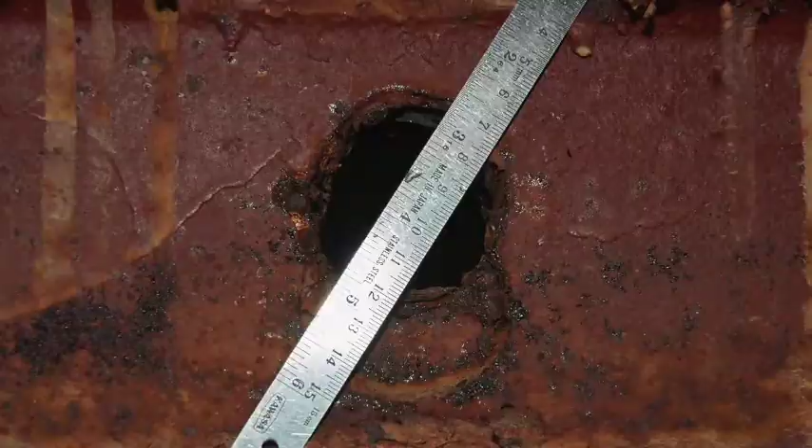I mean, what I'm getting at is this should have stopped them in their tracks. Forget everything else. Absolutely. If they never went under the bridge and if they never saw everything else, this should have stopped them. One look at this is, sorry guys, that does not comply to code. Remove those wheel restraints, remove those rails. I want to see code compliant material there. And so Gary would never have been legally allowed to use the bridge with the rails the way they are? Absolutely not. So once again, how did that happen?

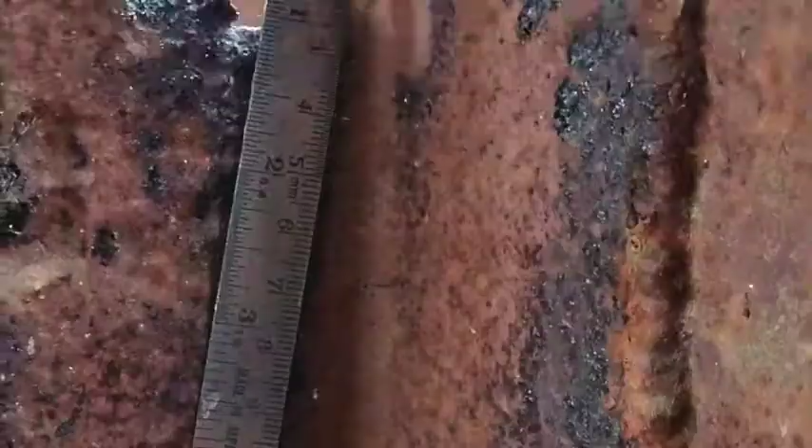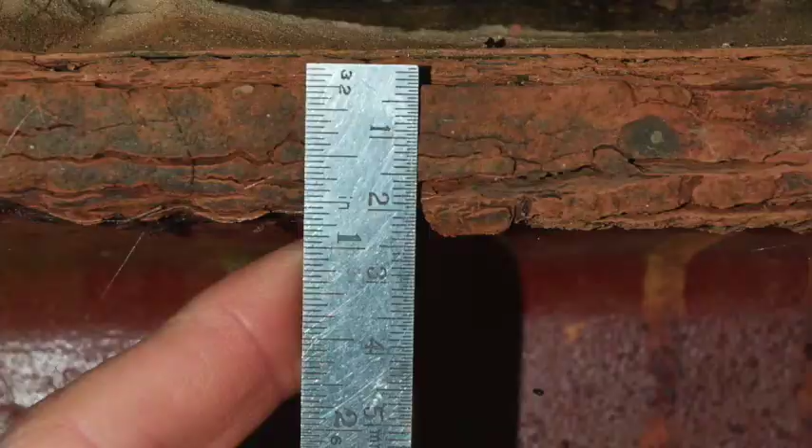And so we're looking at Bridge 15 March 2015 0031. Again, for me, there's no way that steel could have been in usable condition 17 years ago when the bridge was built. Assuming the environment's as benign as you describe it, there's severe corrosion. Beyond pitting to the point where we can see clean through the member. Who can look at it and tell me what's happening, because these are not subtle things. It's rusting, Jack. Yeah, it's rusting. There's your problem. So it's not a matter of a subtlety.

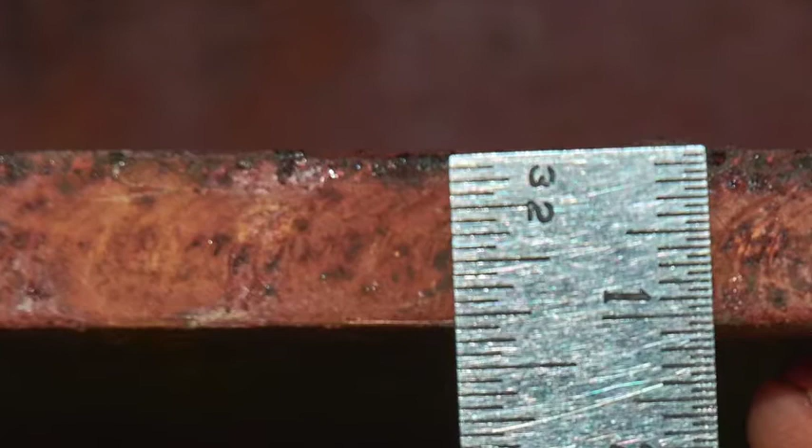It's basically falling to pieces. Looking at this picture, and again, this is DSC 1342, the damage where the steel is actually missing, would it have been possible from a coating standpoint, let alone just from a plain looking at steel standpoint, would there have been any signs of damage there when the bridge was installed 17 years ago?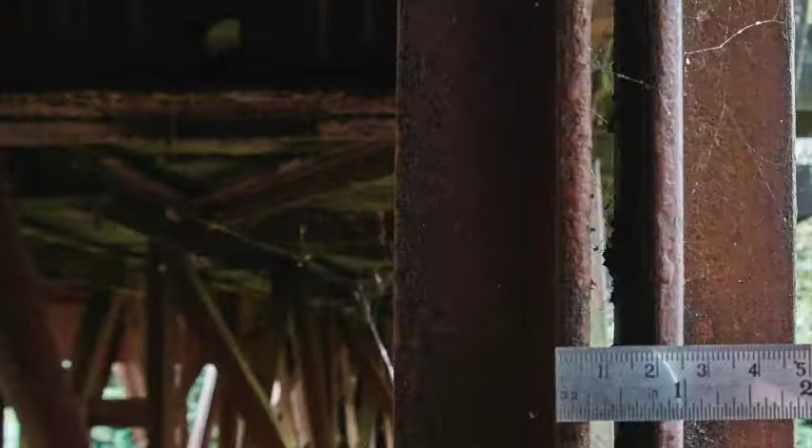Almost certainly, assuming the bridge is in the environment that you're describing. Yeah. Because the deterioration of the member that's in the photograph we're looking at, DSC 1342, is such that it's physically impossible in the absence of any other intrusive elements. And the intrusive elements would be something like salt, air. Ordinarily, yes. Sometimes though, stray current and those sorts of things is relevant. But from what you tell me, this is in the bush with nothing around it. Yeah. And there are no electrical cables going through it or over it anywhere near it. Stray current's highly unlikely.

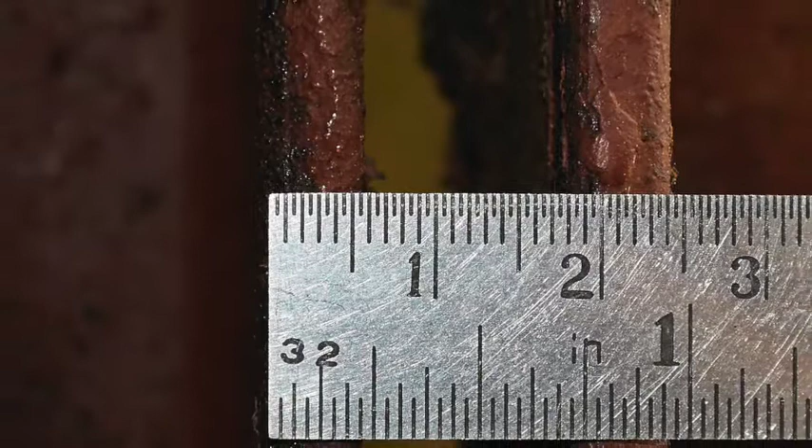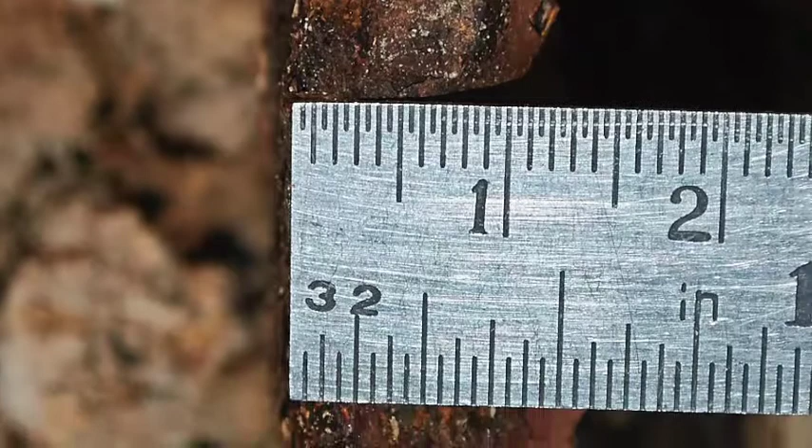But looking at that and in answer to your question, for it to have deteriorated to the extent that I can see clean through it, over a period of 17 years, says to me that it had significant corrosion at the time in which it was installed, and it was poorly protected. Yeah, that's pretty much what.

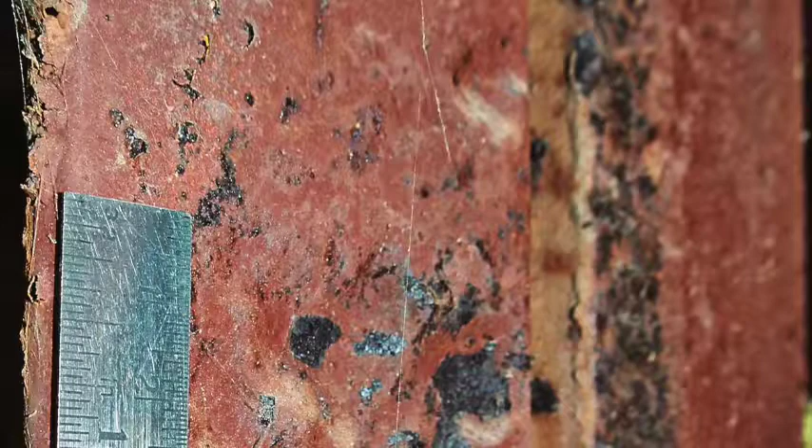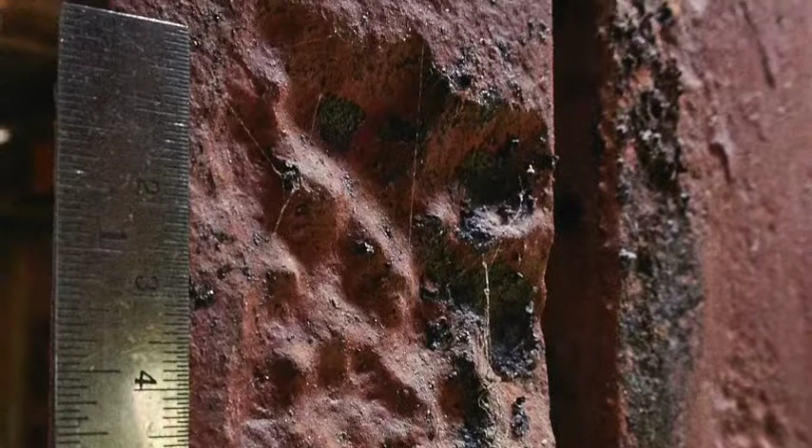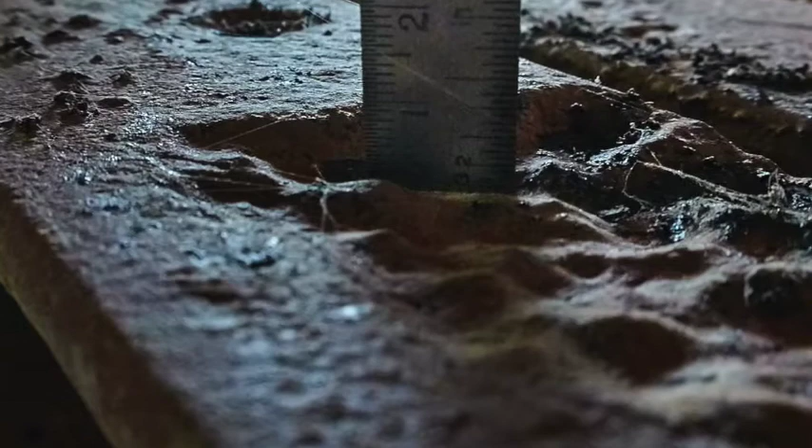Yeah, I'll say. But if you went back to 1998 when the council inspector went to inspect the bridge, again, I'm not a council inspector, but I should have thought that if you went under the bridge and looked, presumably if you had even the slightest knowledge about construction, you should have been fairly confident in seeing something wrong. I mean, I can't imagine that they would have said, "Oh, that's fine."

Yes, and I mean, it might be a small bridge, but yes, I would say that even if he was remotely involved with the building control department of the council, then it would have at least raised alarm bells to bring in someone, even if it was an external independent consultant.

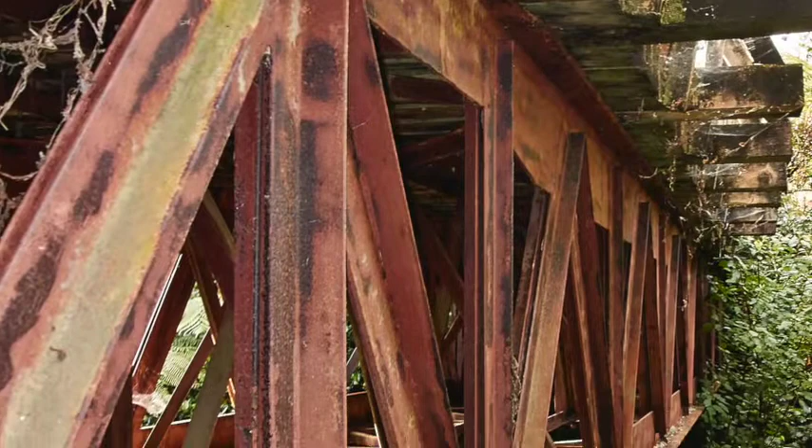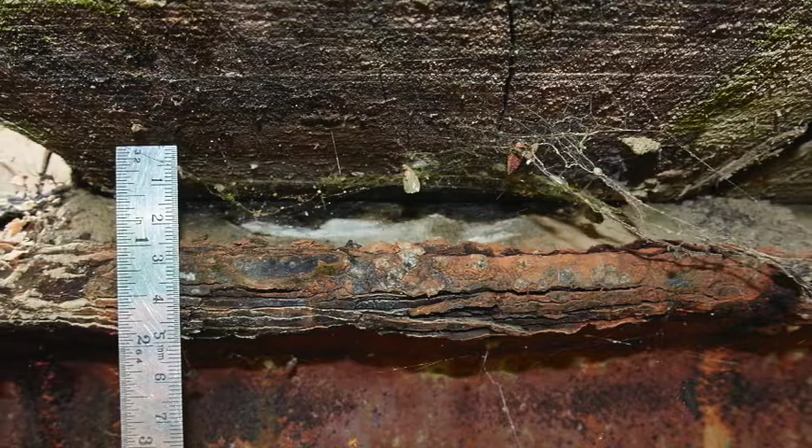I mean, to me as a layman, I find it rather difficult to understand why all of this didn't happen and why the bridge is still there 17 years later. And I listened to an audio recording of a council meeting recently where Pat Dougherty, the CEO, basically said that as far as he was concerned, the council staff had done absolutely nothing wrong. It's almost a question of did they do anything right, in the sense that the inspector didn't inspect it, the PS4 was accepted and it was obviously deficient.

A lot of bits of information are missing, and even now the council have had 2 reports produced and both of them say that the bridge was pretty much unserviceable from the beginning, numerous mistakes, etc., and yet it seems the council are saying, well, we didn't do anything wrong. Does that mean that they did everything correctly that they should have done?

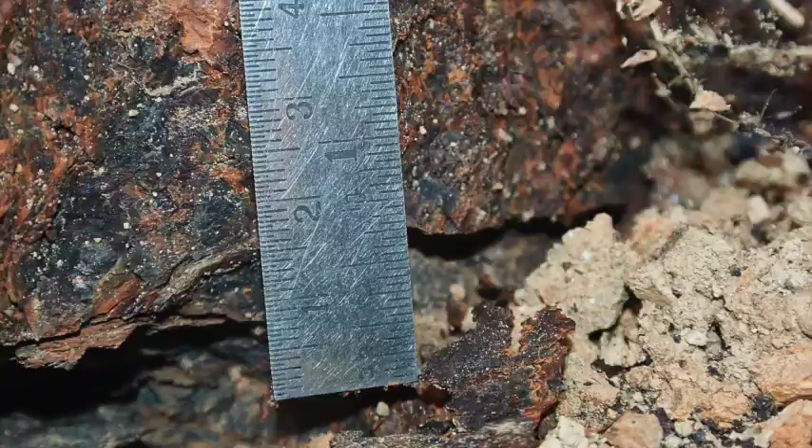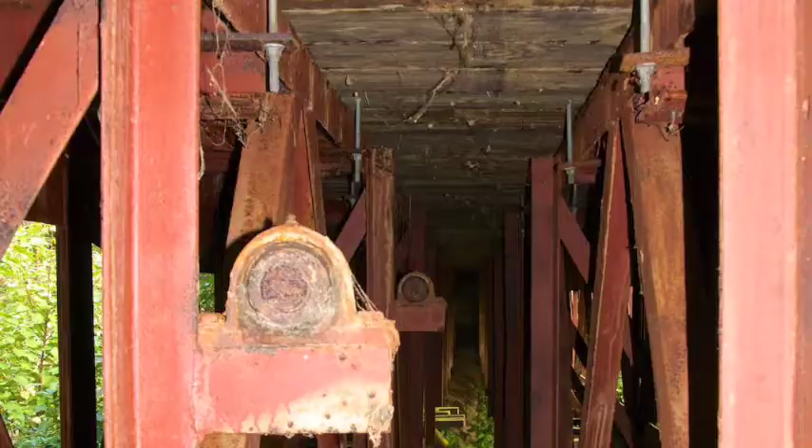And the simple fact, at the end of the day, we have a performance-based code. And basically, we have a bridge which is unsafe to drive on in a truck, and it was meant to carry trucks, and from day one it was unsafe. Therefore, I don't believe the council could claim that they have done nothing wrong.

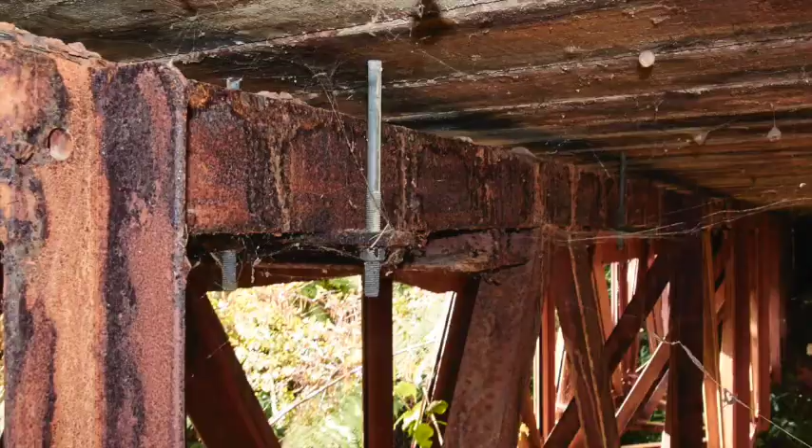A good way to end this program is with an instructive excerpt from a council meeting held on the 9th of May 2013, in which the bad bridge was being discussed by council. The voice you hear is that of Pat Dougherty, the CEO of the council.

Yes, there's an assumption here that the council staff made mistakes, and this, I've been involved with this process up until probably about 18 months ago, but it is incredibly complex, convoluted, and long. So we can certainly give you a briefing on the full story, but the assumption that staff have made mistakes through this process, we don't necessarily accept at all.

Finally, I want to make one thing very, very clear. By far, the majority of the staff at the Kapiti Coast Council are hard-working, conscientious, friendly, and take pride in their jobs. In the small way in which I have had contact with council staff, I have without exception been both surprised and heartened by just how much pride they take in their work.

The things you have heard in this documentary apply to a very small number of council staff, not to the majority. It would be a great disservice to the council staff and the community in general to in any way take what you have heard as being a general reflection on the men and women working at council.